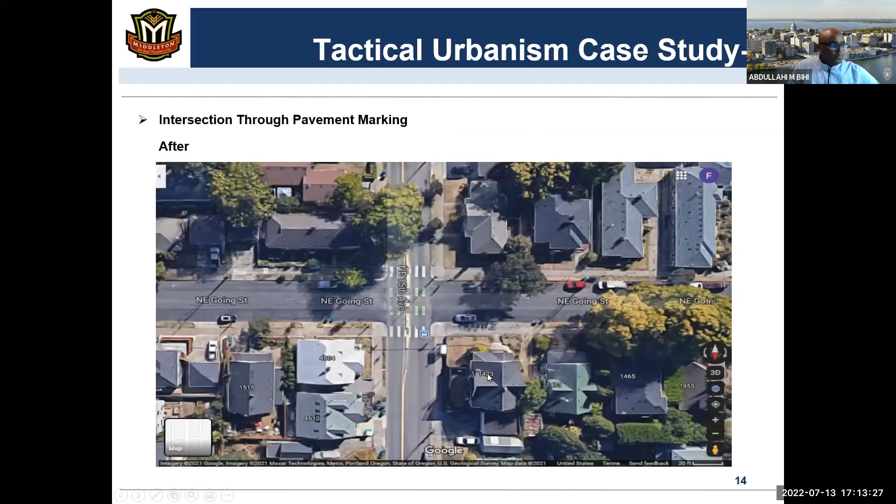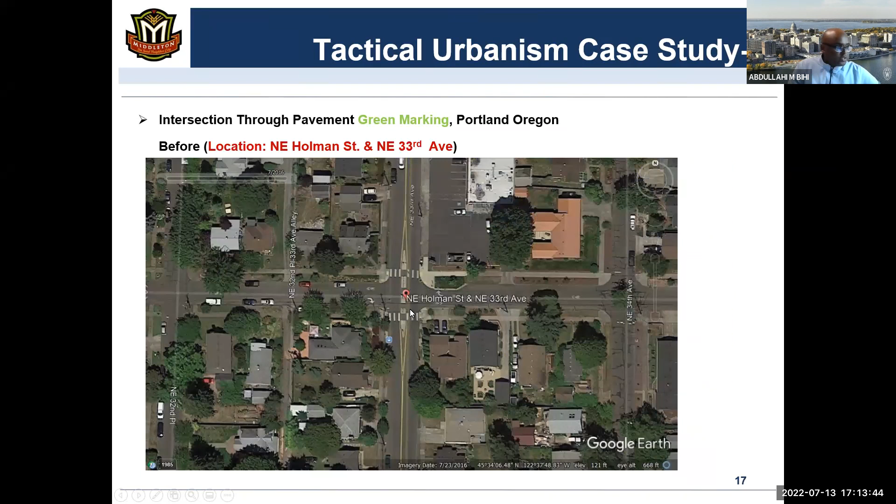The second intersection also shows similar results. In the beginning, this intersection had no crosswalk or cross bike markings. After installation, and the third intersection also shows similar results, meaning that installing green bike cross pavement markings improves the visibility for drivers as well as the safety of bicyclists.

So this is what case study one is about: improving the safety of the pedestrians and improving the visibility of the drivers after they install the cross bike pavement marking on the intersection.

This intersection was also installed in the city of Palo Alto, California. As you see here, you will see another sign installed at the corner side of the street, and the main purpose of this sign is to state the name of the project as well as the email of the project. The purpose is to invite people to tell their opinions about the intersection, so the city can study the public opinions.

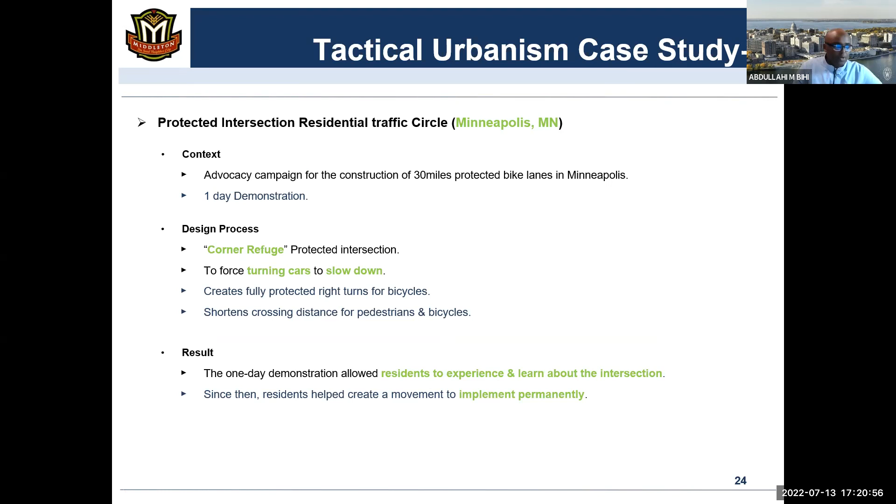The results show that this one-day demonstration project at the protected intersection allowed residents to experience and learn about the intersection. After residents learned about it, they helped create a movement to upgrade this temporary protected intersection into a permanent one.

Moving to case study 4, this was a tactical urbanism project called a curb extension, implemented on Coxe Avenue in the city of Asheville, North Carolina. The purpose was for the North Carolina Department of Transportation to test infrastructure treatments that would calm traffic and improve safety for pedestrians and bicyclists. The city of Asheville installed this curb extension along all of Coxe Avenue, as you can see.

The North Carolina Transportation Department studied the effects after installing this curb extension. They painted it gray because the gray color somewhat resembles concrete.

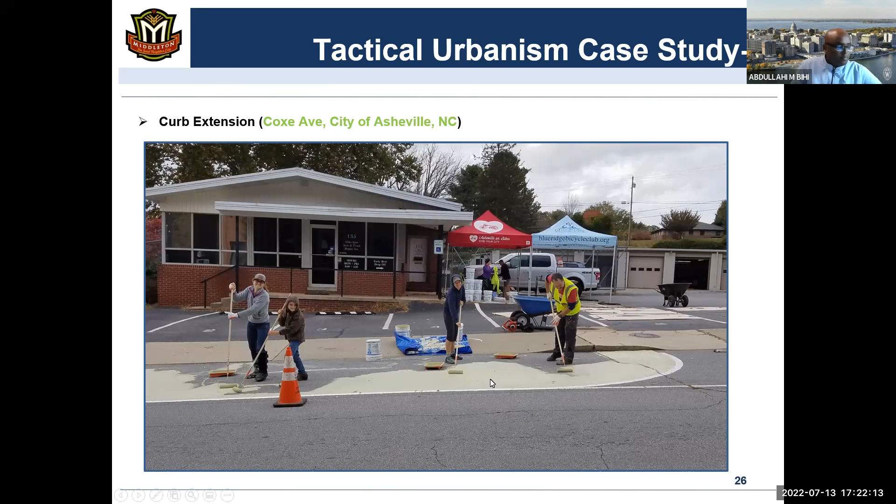The results showed that before implementation of the curb extension, the risk of pedestrian fatality was more than 35%. After implementing the curb extension on Coxe Avenue, the risk of pedestrian fatality dropped to almost less than 5%, which is in favor of the project.

The North Carolina Transportation Department also reduced the original speed limit of the avenue from 35 miles per hour to 25 miles per hour to ensure pedestrian safety. At 35 miles per hour, the rate of pedestrians surviving being hit by a vehicle was 68%. After reducing the speed limit to 25 miles per hour, that safety rate increased from 68% to 89%.

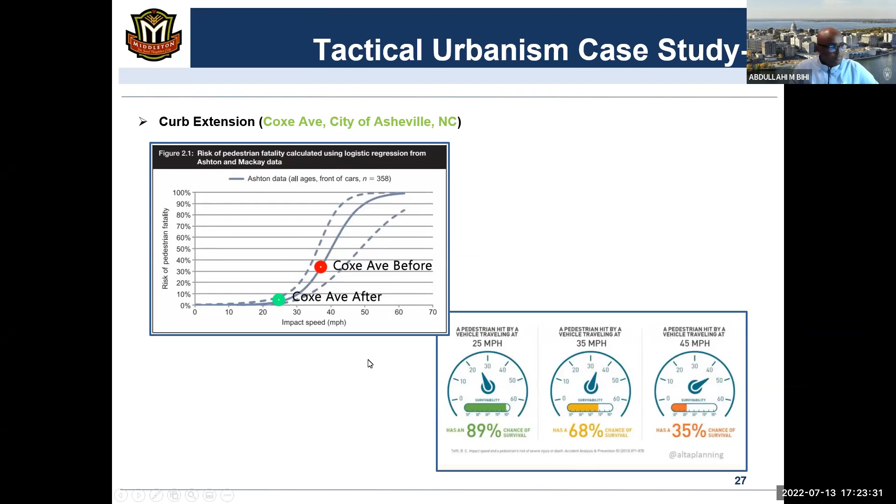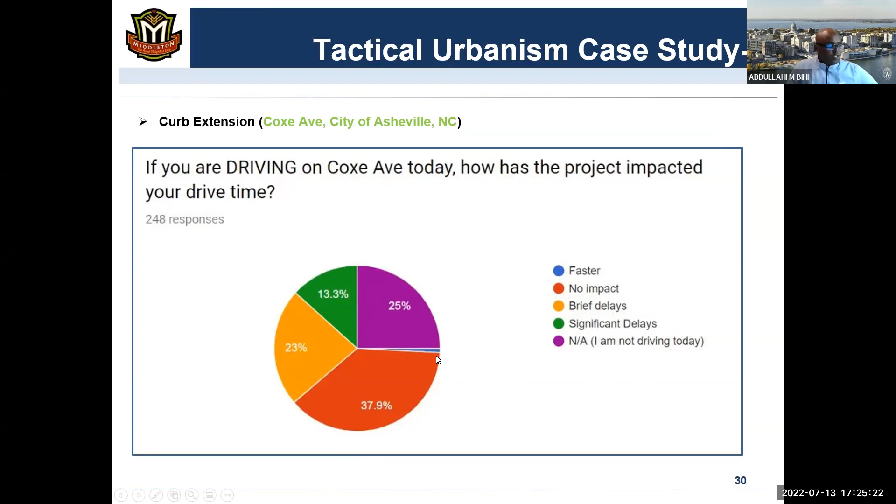The second question asked drivers how the project impacted their drive time on Coxe Avenue. Of 248 respondents, those who said faster were negligible, 37.9% said no impact, 23% said brief delays, 13.3% said significant delay, and 25% said not applicable. So it seems that this result also favors the project.

And this is the last case study that I would like to present with you.

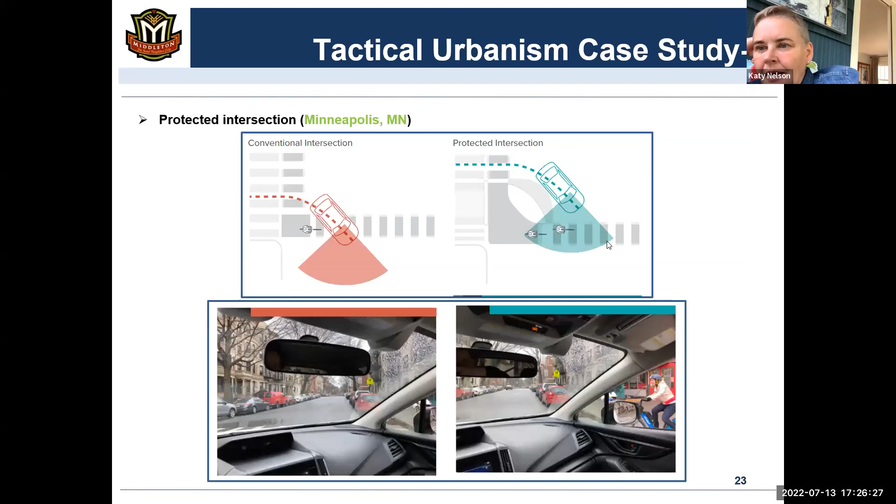Mark, this is Katy. Bihi, thank you so much for that, that was a really great presentation. Mark, is it the Minneapolis example you're thinking of? So sorry, can you repeat that? I think it was Palo Alto, with the temporary circle - or did they just make it permanent after? As the paper says, there was a movement to upgrade the protected intersection into a permanent one. They didn't say they did it, but there was movement, and the neighbors also took part in that movement to upgrade it to a permanent one.

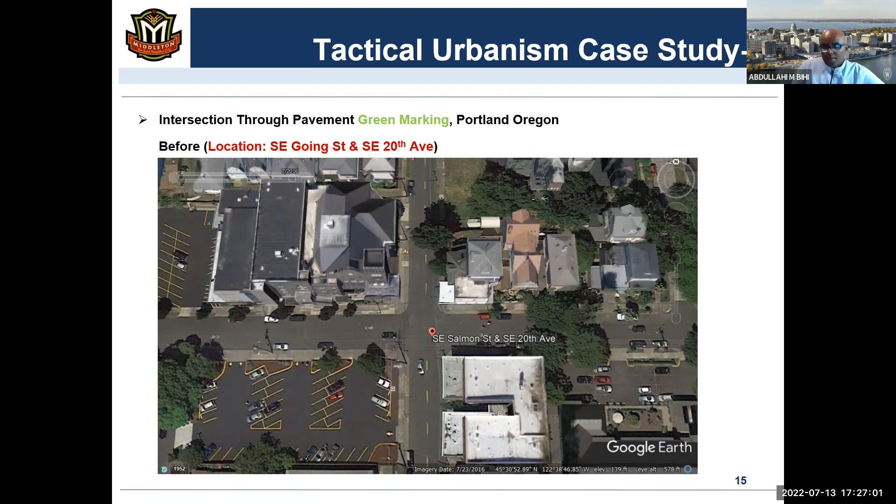I think, yeah - we're, can you pull up case study number 2, please, Bihi? There you go, right? All right, and then the next slide please. And then this is the one where they took the stop signs away completely and just used the circle. Right, this one.

Did they take the stop signs away before they tested the circle, or did they put the circle down and test it for a while, then take the stop signs out and test it again?

So after the first survey, there were negative comments about the signs. The city decided to take all the signs away and let traffic flow freely at the intersection. I imagine that just took some of the confusion away, having the stop signs gone.

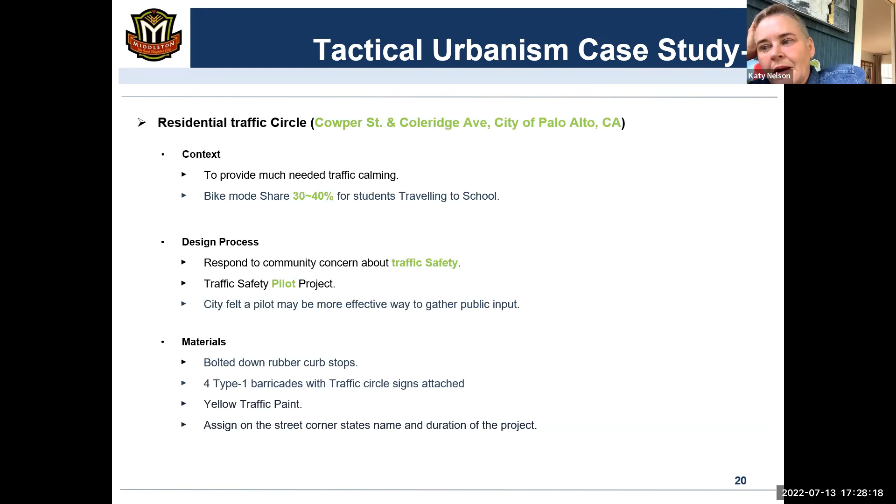So this idea is intriguing to me, that bikes could ride on that painted surface. It would be a slowing technique for traffic, and kind of serve both purposes. Anyway, that intrigued me a lot, and it seems like it would be a fairly negligible cost, except for the paint, but maybe I'm wrong.

This reminds me of that road next to DSW. I don't know what it's called, but I think the Foundry's on there. That's Market Street. Not the same treatments, but similar in that there's parallel parking in the spaces for cars to pull off.

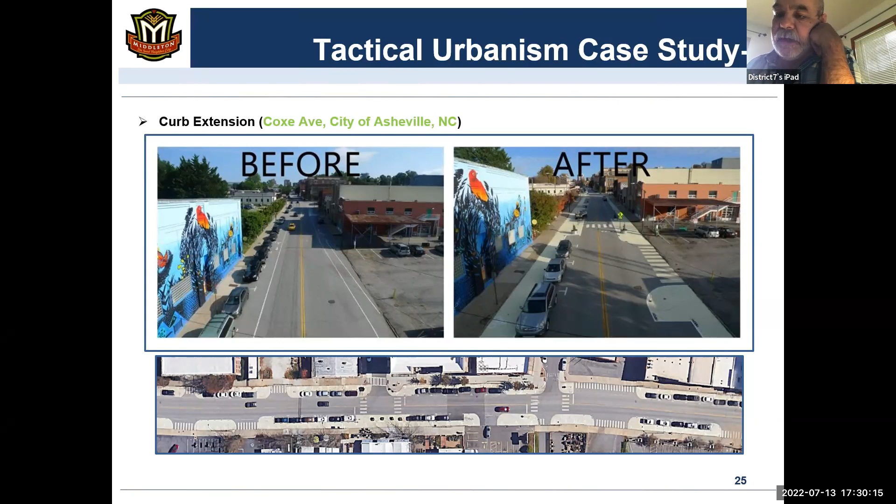So the question here, for the Elmwood Hubbard Avenue area, since this is what we're discussing at this point, is the staff suggestion of one of these temporary traffic circles to put where? Well, I think you've been talking about Elmwood, and I always forget if it's Bristol or Middleton.

That was my question, is it Bristol or Middleton? I have custodial staff here, just a second. I think it's Bristol. Okay, Bristol, it's where the four-way stop is. Yeah, that's Bristol.

So with this portable traffic circle, how does it work? You put it out, you do a survey with the neighborhood after a period of time it's been in, to see if there's been some kind of measurable results from it?

I guess my point here, as we're discussing this, is that we're looking at redoing Elmwood in 23 and 24. So if we were going to put in some kind of test thing, we'd want to do it now, so that whatever test there was, we'd have some kind of results when we went to do design work for redoing the road.

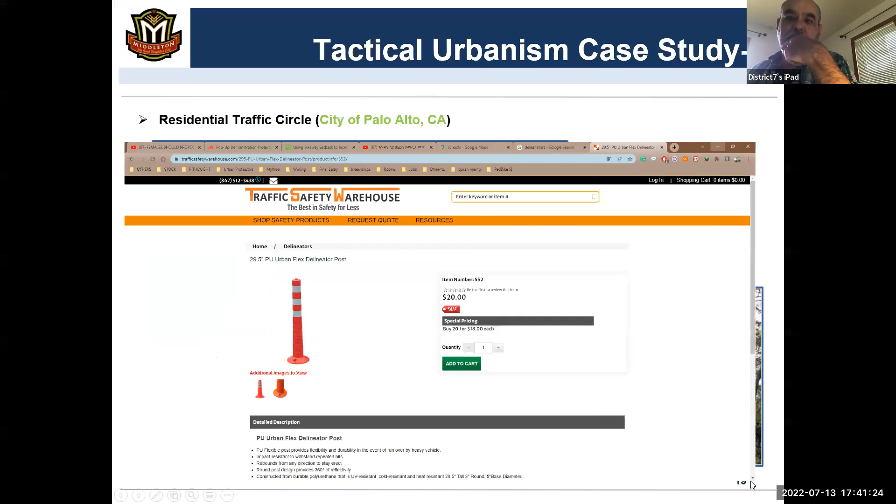Do you ever see examples with green posts or white posts? Why still that orange color that indicates a construction zone? I didn't see anything about this green color. Why did they put it? But they didn't mention it in the paper. Just wondered if you saw anything. No big deal.

My question would be, do those red or orange posts stay once that becomes a permanent traffic circle? No, actually these traffic circles as well as these barricades, they use temporarily and then they remove it and replace it with the traffic delineators, the one I showed you. Then are those permanent, what you have on the screen?

Before they upgrade it, they use these delineators as temporary for a long period. But I have to check again, I'm not sure if they are still using it. All right, very good, thank you.

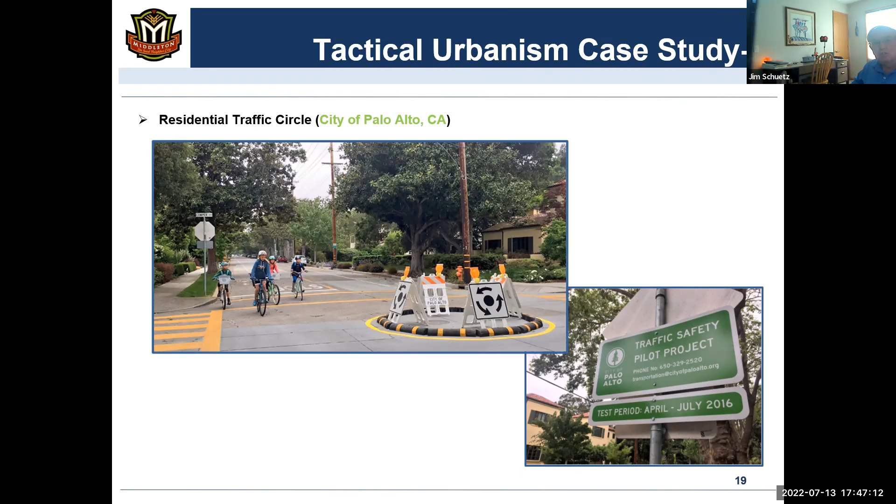My name's Dan Ramsey, I'm the District 7 Alder and represent Plan Commission. Could everybody else introduce themselves to Tad? Jim Schuetz, live on North Avenue, have lived here for 46 years. Ken, a lifelong resident of Middleton, and I'm the liaison for the Commission on Aging. Ella, I'm going to be a senior at Middleton High School, and I do track, cross country, and mountain bike race. Katy Nelson, I'm an alder for District 3. Terry Scheffner, I'm also on the Public Works Committee, so I'm the liaison from that committee. Nate, I live in the Henry Court area, downtown, kind of by the library and St. Luke's. And Tad, sure, I'm Tad, I live in the Pheasant Run Apartments on Century Avenue. I walk and use the bus to get most places, although a month ago I finally bought a folding bike, so now I have all three of the titles of the committee.

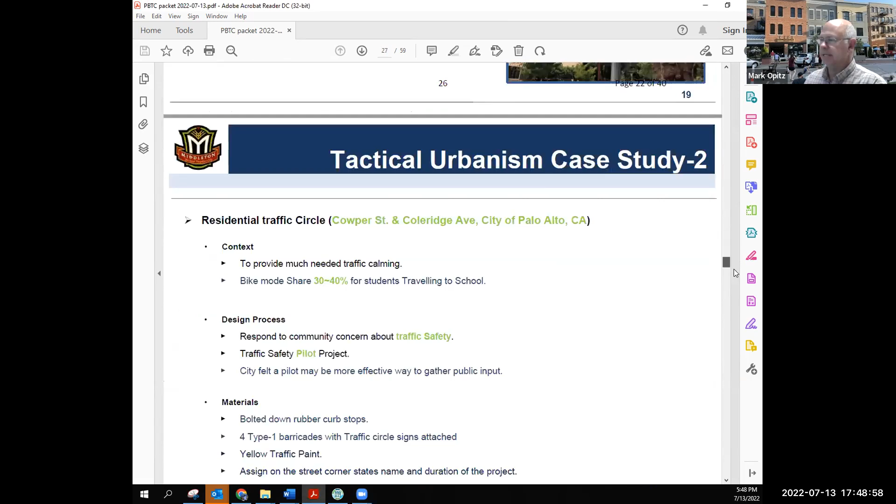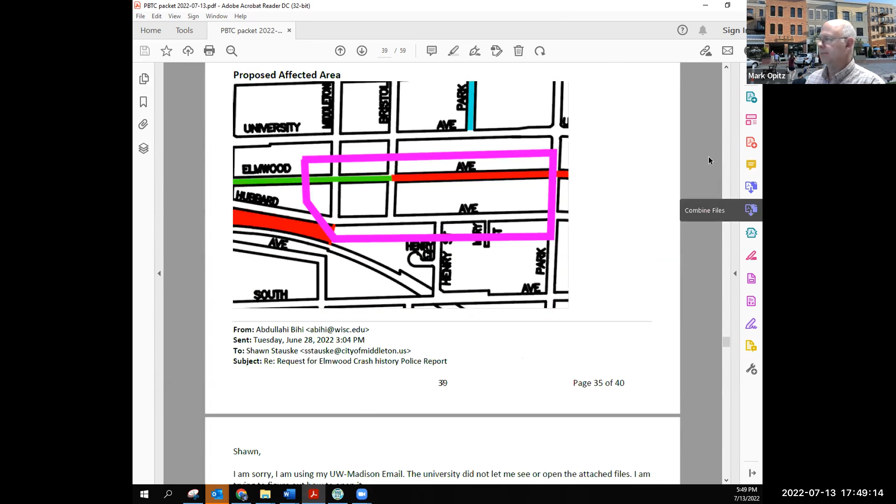As Katy noted, and I know from talking with Katy over time as well, there's been some concerns about speeding on Park Street. When we installed the bike lane a few years ago, we removed parking from the east side of the road. It's been wonderful having the bike lanes, and I think there's been a significant increase in people who bike on Park Street and Gammon Road. We of course turned Gammon from 4 lanes into 2. That's been a great addition, but there's this lingering concern about vehicles either driving too fast and/or passing on the right at intersections.

My revised recommendation is to suggest we proceed with the buffered bike lane concept, and focus on that, and do a little more work on the vertical delineators. The reason is I asked our public works folks; I had assumed the street sweeper could fit within 7 feet, but that was an erroneous assumption. Apparently the width is 102 inches, about 8.5 feet, so that's not going to work, because the street sweeper needs to still be able to operate. I was envisioning the delineators would be removed in the winter so snow removal wouldn't be a problem, but there's obviously a labor issue associated with installation and removal.

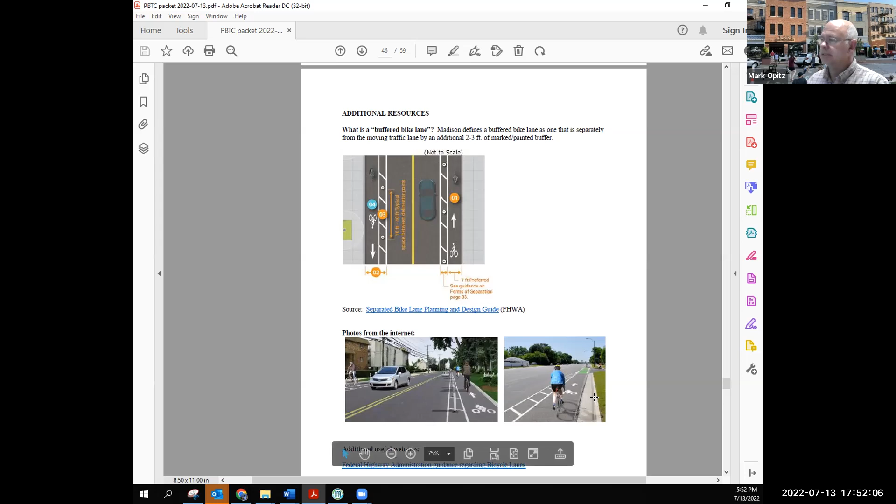So this doesn't come without a cost, but I do think the buffered bike lanes would be a way to visually create more space for bicyclists and narrow the through lane for drivers, which has the effect of really conveying that this is a bike lane and not a parking lane or a passing lane. So I just wanted your reaction to this idea, and if you'd rather not take it up now, we can discuss it another time. Does anybody have any comments or questions?

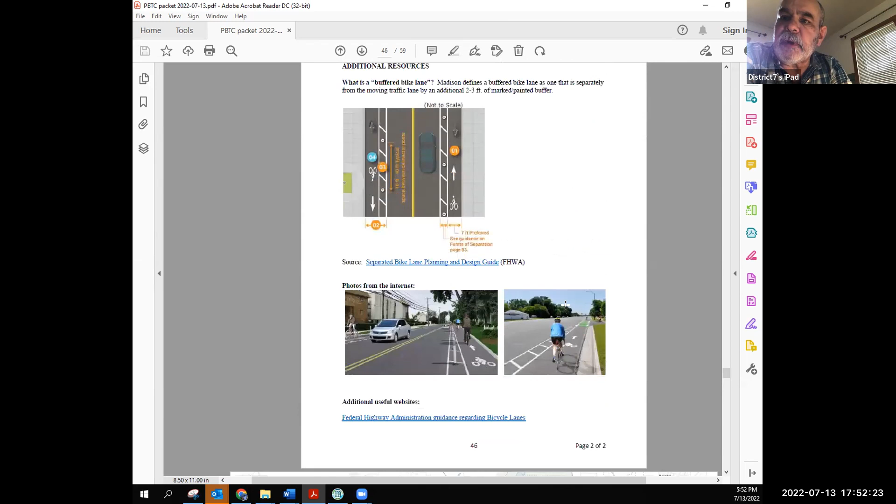So, Mark, would this be a 23 budget to do this with the cost factor? Well, I was hoping that as public works staff applies paint around the city, this could be absorbed as part of that workload for this year, but we need to coordinate that with public works staff. Certainly purchase of delineators and installation would be a budget decision.

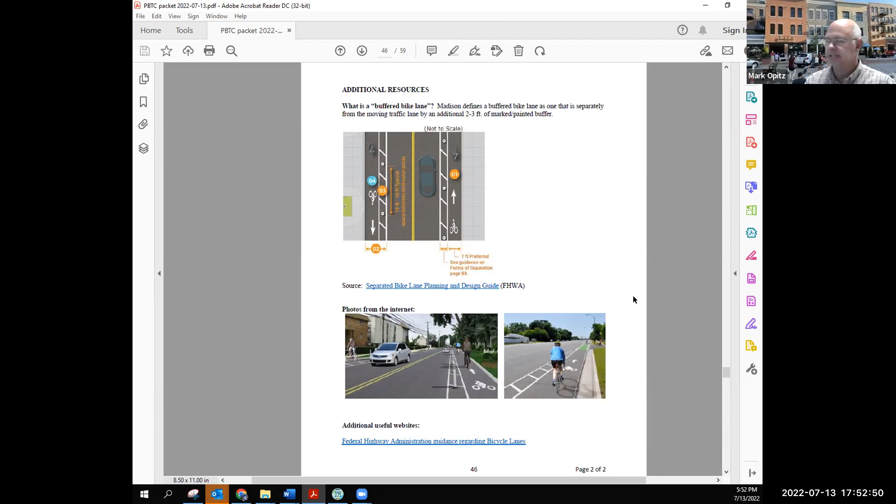Right now, I just wanted to see if you'd like staff to further investigate the buffered bike lane idea for Park Street as a solution for the issues we discussed. How do you handle emergency vehicles like ambulances if they have to stop in front of a house? Well, that's if the delineators go in. That's a valid point, I thought 7 feet was sufficient, but the spacing is something else we need to look at. So I think that's not quite ready for a vote tonight, but the buffered bike lane concept is independent of the vertical delineators. The delineators, if needed, could come later, but this would be a start.

So the question on the table is whether or not we want staff to try to work with Public Works in order to work this into their workload yet this year. Correct. Thank you.

Dan, I'm not sure you can see my hand raised. I'm sorry, no, I did not. I apologize. No need, I missed it. Go ahead, Katy, please.

I think that it's worth trying. If it can be worked into the project at hand this summer, it's absolutely worth trying. As far as vehicles that have to stop on the road, emergency vehicles, as it stands now, basically a vehicle parks and just uses flashers. Usually, yeah, delivery vehicles are the same. I agree with Katy that it's definitely worth looking into.

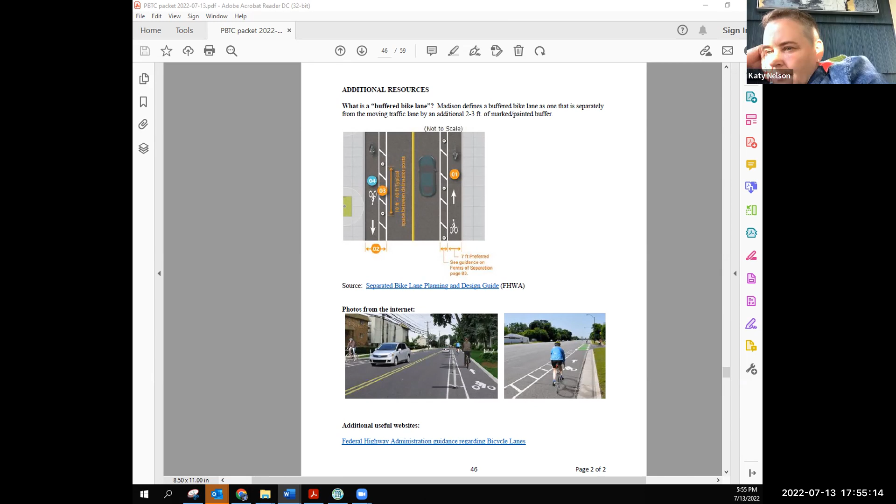All right, can we get a motion to that? Yeah, this is Katy. I'll move that we add the painted buffered bike lane on Park Street this summer. So you're directing staff to work with Public Works to have it included in this summer's workload, if at all possible? I would like, yes. Okay, staff to work with Public Works. Yes, if possible. Okay, we have a motion, do we have a second? I second that motion. Okay, we have a second.

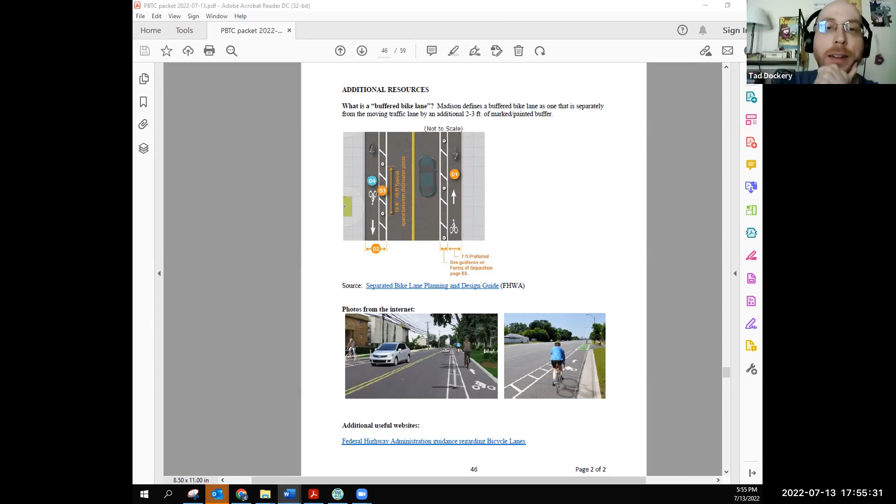Are there any other comments? That was Ella. Thank you. Hearing no other comments, all those in favor say aye. Aye. Aye. Opposed? That motion carries.

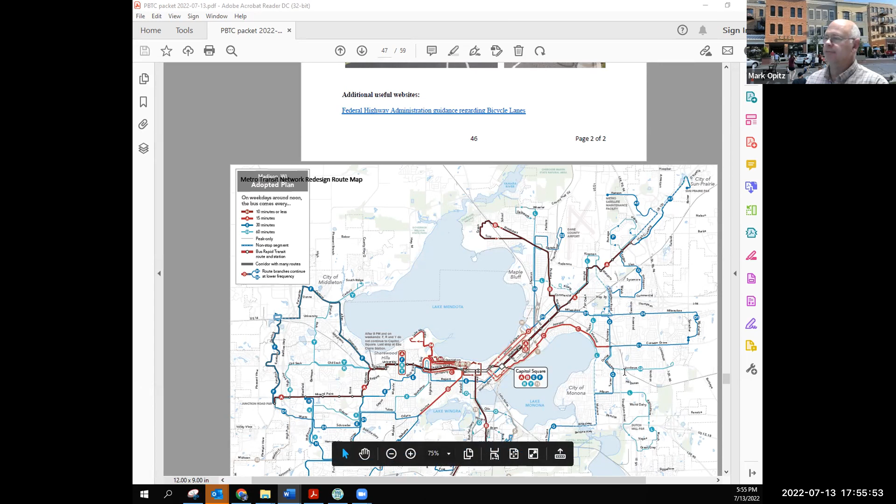Thank you. Okay, item number 3 is Metro Transit Network redesign route map. Yep, and Mike Cechvala from Metro Transit is here in case you have any questions, but I'll update you by letting you know that Metro has refined the plan, which is now labeled the adopted plan, adopted by the city of Madison. In discussing this with Metro Transit staff a couple weeks ago, we felt it would be good to have the city, since we're a contracting partner with Metro, to officially adopt it as well.

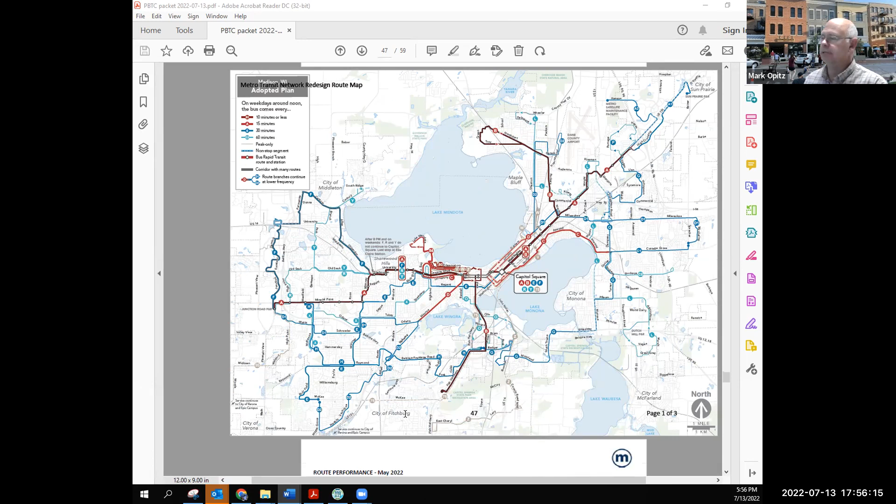The concern, you'll recall from previous discussions, was what are we doing, or how is service going to be impacted on the northeast side of the city? We worked with Metro, and they worked with us, which we appreciate, to come up with a plan, a way to make Route Y, which would be this Old Sauk, Gammon Road, Park Street, University Branch to northeast, become now an all-day service. As you'll recall, it was originally proposed to be peak hour only, which was a huge concern for us. So that would now be all-day service, albeit a 60-minute service. It's still a reduction in service for the northeast side, but at least it's hourly service, and some people are close enough to walk a reasonable distance to this location.

The backbone of the service, Route F, would be 30-minute service. Tad, you'll be delighted to hear that, 30-minute all-day service every day of the week. He's smiling.

So that's going to be the backbone, and that hasn't changed. What's changed is Route Y would be all-day 60-minute service. The next item on the agenda addresses the funding aspect, but we just wanted to get your endorsement of this. This is the map we've seen a couple times in the past, so we've already discussed it.

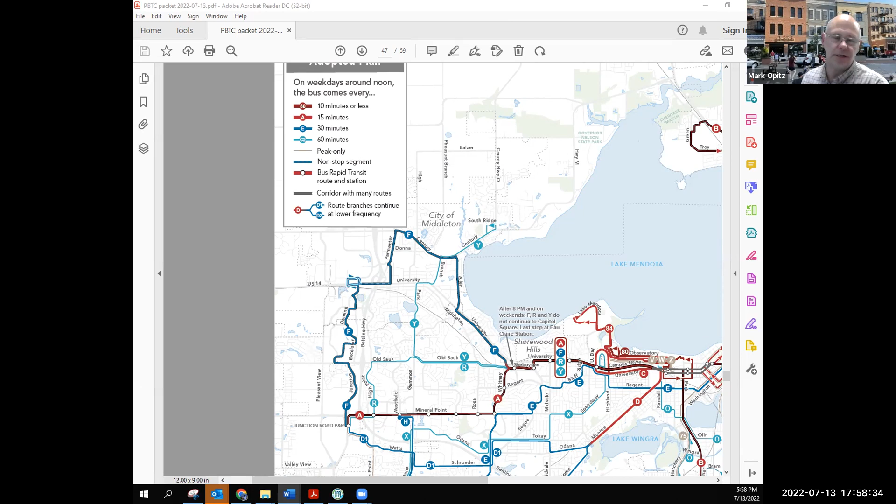Mike, since you're here and took the time, was there anything you wanted to add? I'm sorry, I should have asked you that earlier. No, that's okay. Just for the motion in the record, if we could call it the Transit Network Redesign Plan, that's just what we called it for the city of Madison, so that there's no confusion. But other than that, Mark, you summarized it correctly.

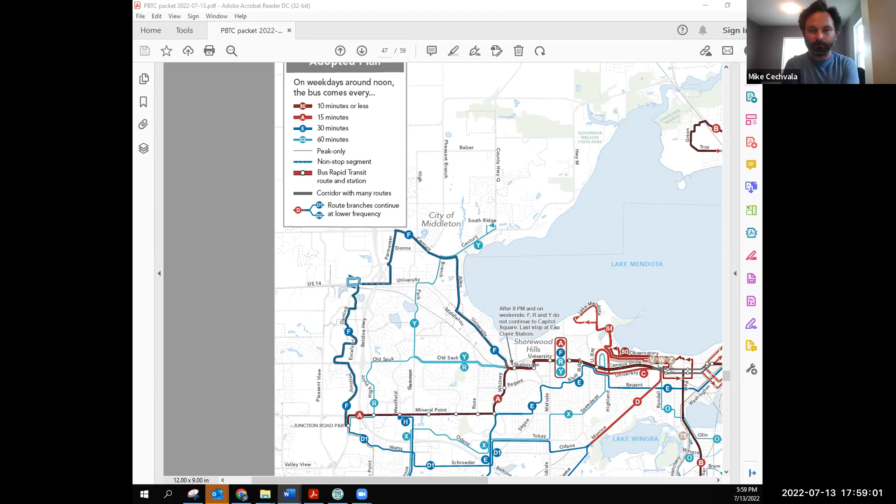I think the only other part of this is the funding aspect, which we think we have a solution for as well, so we're talking about that next. We'll move on to that. Item number 4, request transit operating assistance under Wisconsin section 85.20.

Actually, since Mike's here, you could speak to this more eloquently than I can. Are you able to, Mike? Otherwise I'm happy to cover it too. I'm not versed in what you're... Okay, go ahead, I'll do it. I'll jump in, feel free to. I'll jump in, and I wrote it in the staff comments, so I'll just quickly review that.

So our friends in Fitchburg and Sun Prairie, I believe, have applied to the state to be recognized as transit funding agencies, per section 85.20. So they now get money passed directly to them instead of through Metro Transit, which kind of diluted the effectiveness of the funds. Actually, that's not how I should have said it. It increased the... let's see, how did I phrase it?

Can you mind if I jump in? Go ahead. So the higher level view here is for state operating assistance for transit systems, they divide the funding into essentially 4 buckets. There's what they call Tier C cities, which is very low volume systems, counties and dial-a-ride type systems. Tier B cities, which is smaller transit systems. And then Madison, and then Milwaukee. So Madison and Milwaukee are their own special cases, and everybody else is either a small system or a very small system.

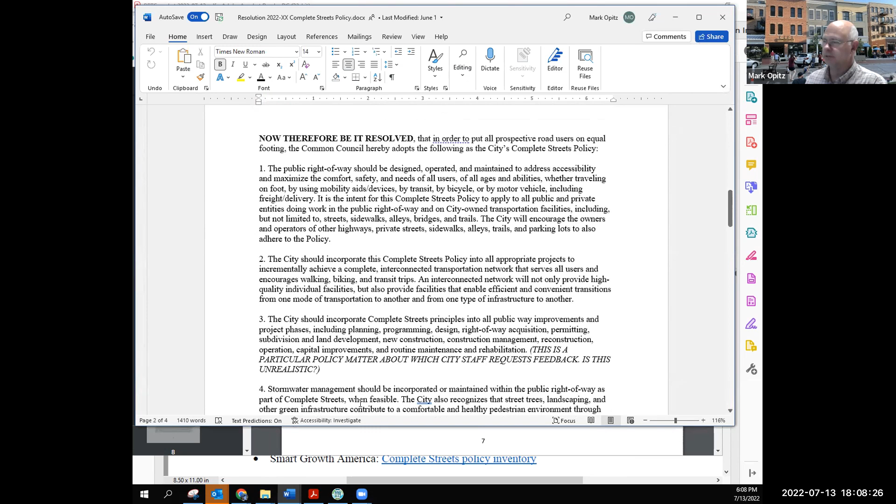Background whereas clauses, setting the stage, and then the resolved clauses were... I know you can't read it now at this meeting, but it gives you an idea of the format. It wasn't neatly categorized by heading, which is what I really like about Cleveland Heights and other communities that have followed that format.

Mark, how time sensitive is this? Well, thank you for asking. Actually, one of the things I want to talk about tonight is scheduling another meeting in a couple of weeks, for two reasons. One, now that we have a full committee again, we didn't have one until this last council meeting, so it's great to have a full committee again. Now we can roll up our sleeves.

We have two items that are pressing. Well, one item that's pressing is developing budget recommendations, which are due in mid-August, so it'd be useful to meet again in a couple of weeks. And then the other thing we could have on that agenda is the complete streets discussion. So I wanted to brief you now on where we're at, and if you wanted to take more time to review the materials and respond to me individually, that would be fine.

I don't know if this would require a motion, but can I make a motion to defer this to the next meeting and have it be the first topic? Sure. Oops, I just lost it. I just think there's a lot on tonight's agenda, and this is an awful lot to consume.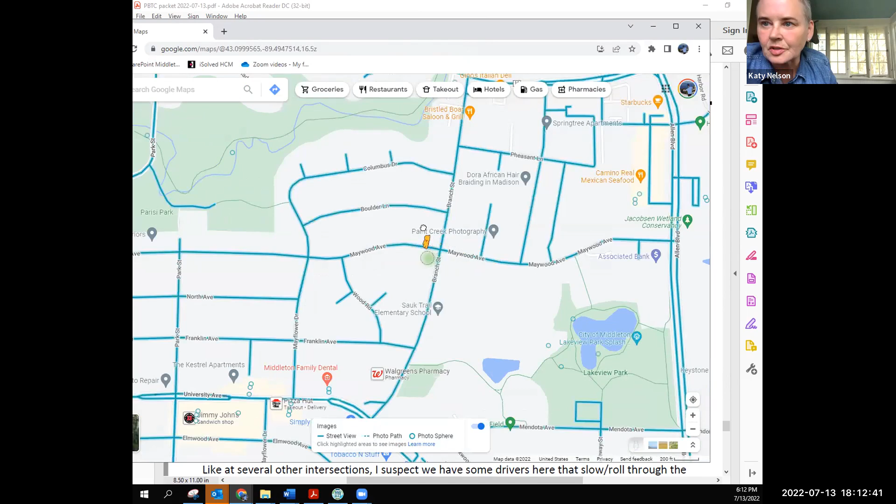Thank you. So in February, I believe, I was asked to come to the corner of Maywood and Branch in the morning before school to check out the situation. It's a four-way stop, if I'm recalling. Yeah, it's a four-way stop, and there's a crossing guard there for school drop off and pickup at the end of the school day. I watched the crossing guard in action and was so nervous for him in the middle of that four-way stop. People in a hurry, people not knowing whose turn it is next. And so inevitably two cars pull out.

People passing on the right, trying to turn, and the crossing guard lives at the corner just to the left of your photo, that's his yard. So he witnesses a lot of stuff all day long. People do U-turns, they'll drop their kid off and do a U-turn right there at that intersection. People have come in at high speeds and then want to turn right immediately.

So they're passing traffic on the right, which is... is that a bike lane? There is parking on that side of the street. The crossing guard has requested that some of the parking spots be taken away, which is just what he's asked for. So I just want to begin the conversation about how we can make this safer, especially for drop off and pickup at school.

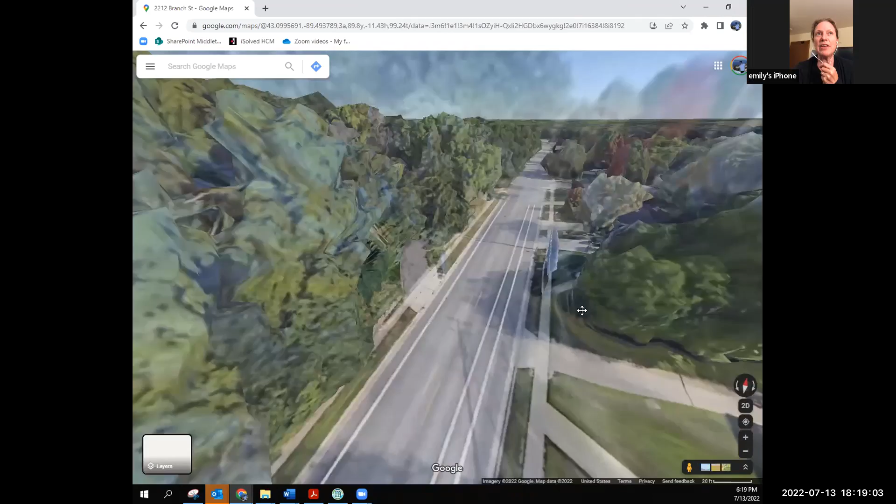Also, on the flip side, on Katie's side, not on this side here, but going the opposite direction, somewhere over there, there is a speeding sign showing how fast somebody is going. And yet there's nothing back on the toward Century Avenue before the intersection. And then there's no correlating one on the other side.

So it's an interesting thing to have a speeding sign on one side. It's also not in a really great spot. I feel like it's about 18 or 24 inches higher than they generally are, or it's placed back, there's something different about it. It was like just put up on a pole because the pole was there, rather than putting it on the ground with a normal pole.

All right, so then, because one of the comments is that people are speeding down the road, especially heavy trucks doing deliveries, a lot of cut through during the pandemic. And I think part of the reason neighbors are noticing is that when there was no school for a year at Sauk Trail, they could easily pull out, and they weren't watching for kids, and they weren't doing all the things you have to do when there's school in session.

And so they suddenly had an understanding that this is when the kids started coming back, people who were used to cutting through because they're not using Allen anymore, the GPSs are instructing them to take Branch.

They're not looking for kids. Their GPS is telling them to go ahead, drive forth. They don't know that this is a student intersection. So there is a lot of concern. I have done drop off myself, I've probably done all the things people have complained about. I don't think that's a good thing, but it is a mad dash because drop off is a 10-minute window.

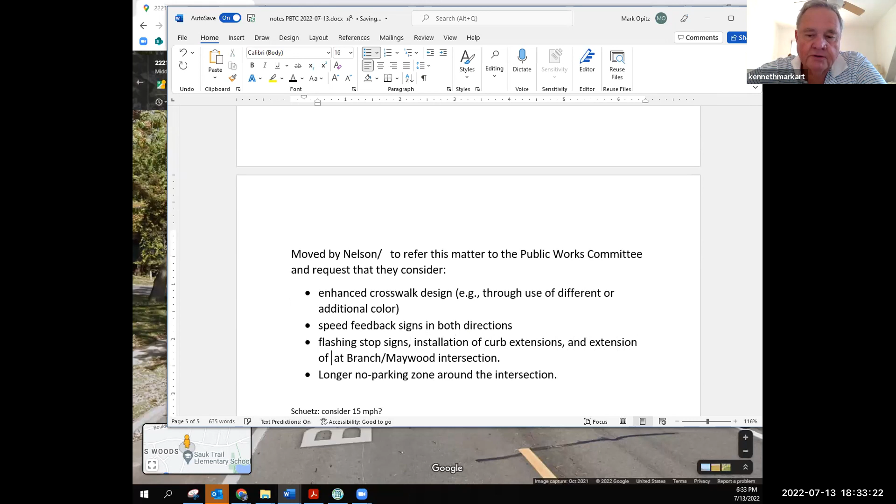Can I make one comment too? Maybe there should be some outreach to the parents who pick up their kids there. It seems like a lot of these issues are developing from the parents picking up their kids. I've driven through there during school days and it's a madhouse, kids running all over, and a lot of parents are in a rush. Maybe some outreach to the school system about what's coming and what they can do to eliminate the problems, because a lot of it is developed by the parents picking up their kids.

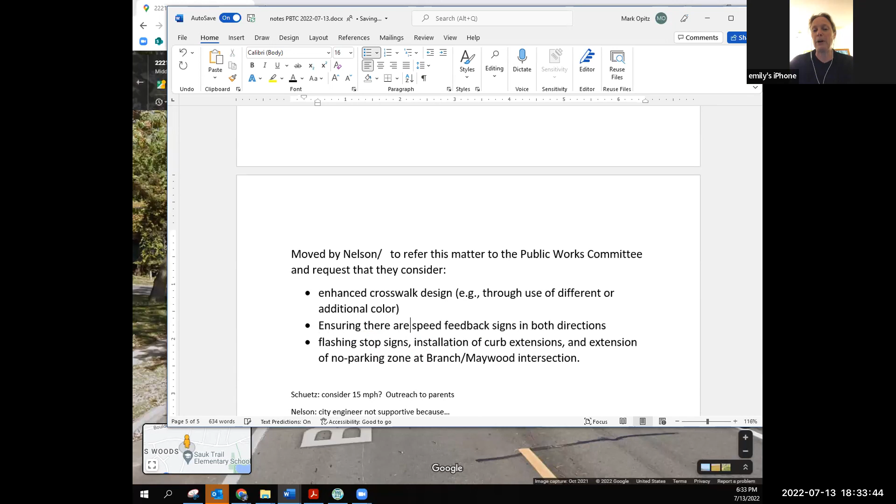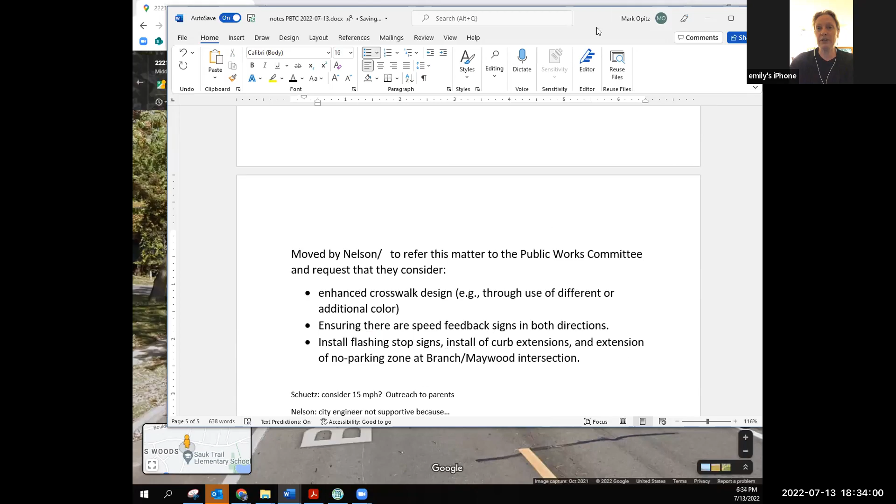This is Emily. On the parking piece, the house at the intersection and her neighbors are okay with where the parking is. The parking issue is actually the house next to the school, because it's on a slight hill and the people trying to exit can't see who's coming.

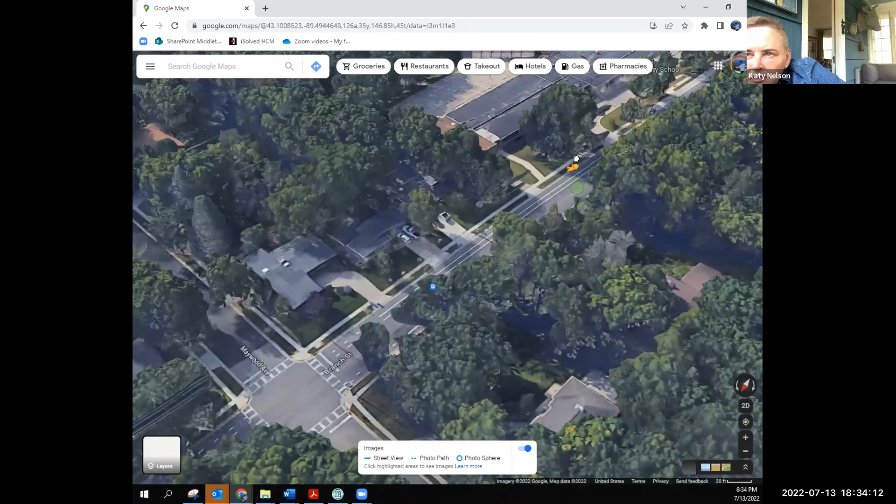And for the signage, I would just like the signs to be appropriately placed. I say that because I'm thinking of that speeding one with the feedback sign - I don't think it's a standard spot, I think it was just mounted when they had a chance. Same with the stop sign ahead, I think they just put it on one of the poles that was already there. So just confirming that it's in the proper place.

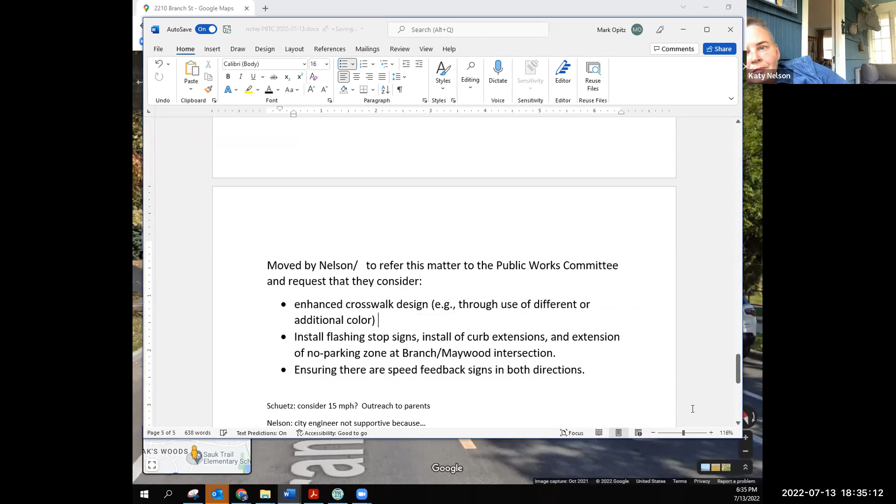So where the enhanced crosswalk design - was that just at that four-way intersection, or along Branch Street in general, every crosswalk? I'd love every crosswalk, but I'll take it at that intersection if that's where we can start the trend. We'll consider it just like our mini roundabout at Bristol and Elmwood, and see how successful this can be.

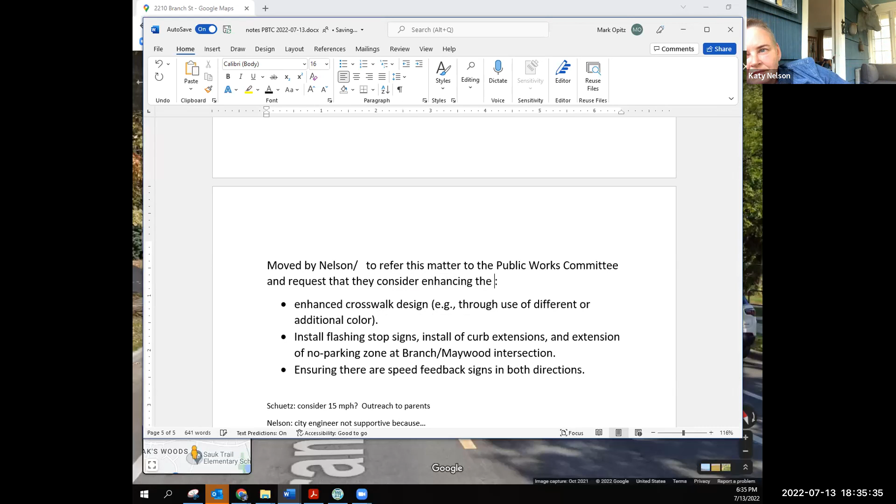I understand all of this costs money, so I don't want them to think we haven't considered that. But the kids' safety, I think, is a really important one. I'm just trying to help you make your case - installing curb extensions to reduce pedestrian time in crosswalks. Is that what you're getting at?

Yeah, curb extensions to reduce - let's keep it simple. We don't want cars to turn into that area. There's various benefits of it, but I'll just keep it simple. And then making sure there's speed feedback signs in both directions.

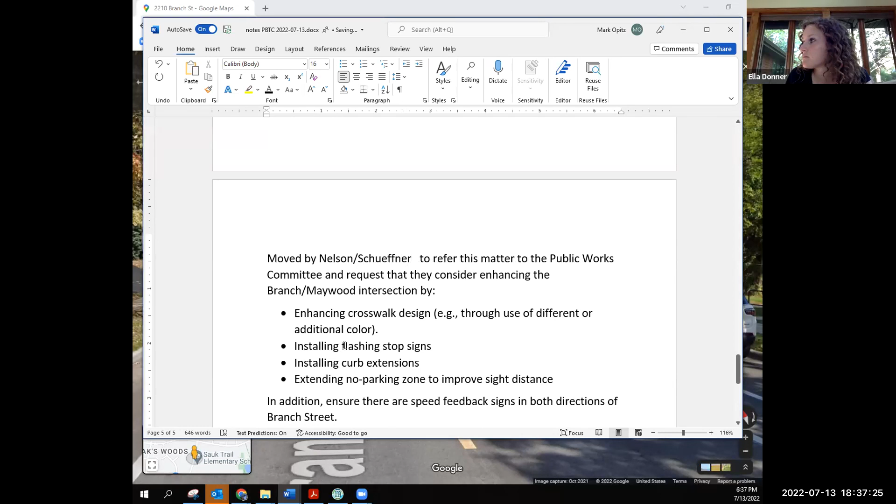Okay, so we had a motion by Katy. Was there a second to Katy's motion? I'll second it, this is Carrie. Thank you, Carrie. So we have a motion and a second. If there's no further questions, all those in favor say aye. Aye. Opposed? Motion carries. Did I spell your name right, Carrie? You did, nice job, excellent.

Okay, we're now to staff updates. Mark, number one, North Mendota Trail. Wasn't sure where we were on the agenda. So I have good news to report.

As of 5:05 today, we are confident we're going to get all the easements for the North Mendota Trail. We've always thought we would, but they actually wrote to me saying that their lender has signed off on it - this is the Arbor Lakes folks. We don't have them in hand, but we're one step closer yet again. What I'm talking about is the easements on the northeast side, to make sure we have permission from the property owners to widen the path.

Yesterday there was a pre-construction meeting with the contractor that's been hired, Badgerland Excavating, as well as utilities and the city street crew and utility crew, to make sure we're all on the same page with this project. The contractor indicated he intends to start in mid-August, but he'll get us a more specific date by the end of next week. That's their goal - start mid-August and be done by November 1st.